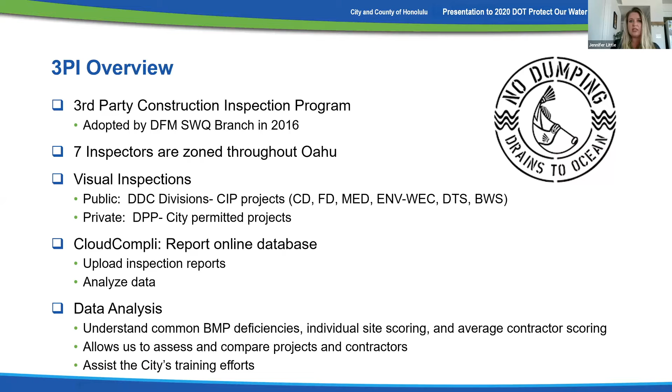So basically, we're able to assess the BMP deficiencies, the individual site scoring of the site. So we'll assign it a grade, if you will. And then we can also look at the average contractor scoring. So with that data analysis, we can use that for training purposes and also to see where we are in the program effectiveness, where we can make some changes and what we need to improve on.

So CloudCompli, like I said, allows us to upload our reports and different data into an online database, and we can use iPads, iPhones, Androids, laptops, etc. And we're also able to PDF and email reports to the contractors really easily with this program. And with the analytics, we can extract data. So as we're putting in how BMPs are working, we're able to extract that data. And I use Microsoft Power BI to develop that into graphs so we can see how we're doing as a program. As you can see with this pie chart, you can see our top deficiencies as a program.

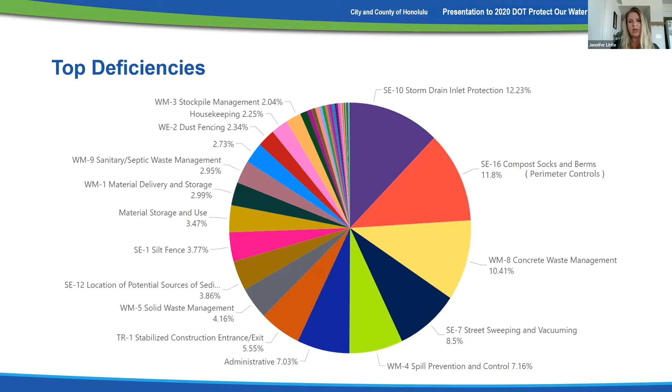So what we're seeing in the field mainly as deficient are storm drain inlet protection, compost socks and berms, which are often perimeter controls for smaller projects, concrete waste management, street sweeping and vacuuming, and spill prevention and control. So these are the top deficiencies that we're seeing program-wide throughout the island of Oahu. And that's with our 7 inspectors all going out to all these public and private projects and the average of these deficiencies here.

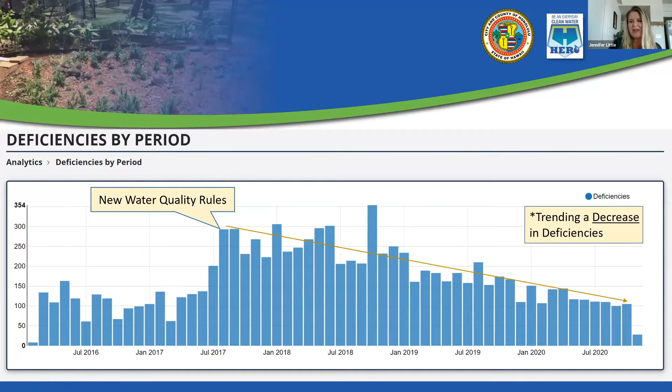Another graph that we're able to see is the total number of deficiencies over time. So we can also analyze the data over time. This was from the beginning of our program in 2016 to sometime last week. So as you can see, when the city adopted the new water quality rules in August of 2017, we had a spike in our deficiencies. And that's when our program came into full swing. So we were seeing everybody at that point. But as you can see over time, those deficiencies have decreased nicely. So we know our program is effective, and hopefully that arrow continues to go down.

So recently we decided to do a pilot virtual contractor training, and we chose a select group. And with our CloudCompli data, we were able to pick who we thought would be good candidates for this pilot training. And again, the focus was stormwater.

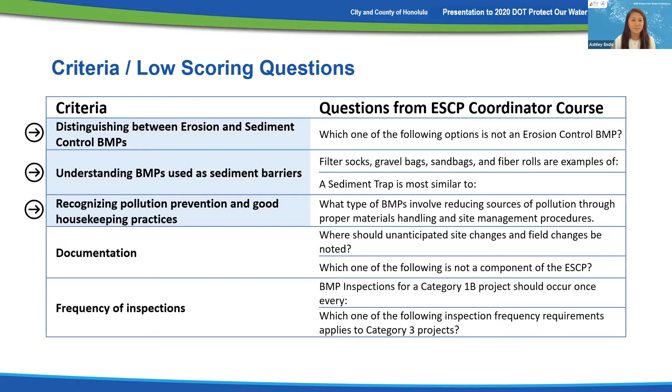And with the training criteria selected, we also verified the link between data analysis and the top third-party inspection issues in the field. So recall the pie chart that Jennifer shared earlier. The table here shows the criteria that was identified from our analytics matched to the field observations.

So for example, if we look at the second criteria that we got from the analysis, understanding BMPs used as sediment barriers, we can see that this links to a field observation of compost socks and berms. And matching allows us to validate the criteria with the 3PI issues, and then we can recommend that these topics be addressed by the virtual pilot contractor training.

And after selecting the topics to cover, we also evaluated the virtual pilot training using pre and post survey questions to try to measure learning.

So we deployed a survey before the virtual training that allowed participants to respond to questions about the course topics and also questions about themselves. And the same survey was offered after the training to see if there was any improvement in the scores of questions. We had 21 participants attend the pilot training.

And for this survey, it was voluntary, but we did encourage that participants take it. But we did see that we had more participants before the training. And because the survey was anonymous and voluntary, we didn't have the same participants before and after. And though our sample size might be on the smaller side, this was our best attempt at measuring learning from the pilot course.

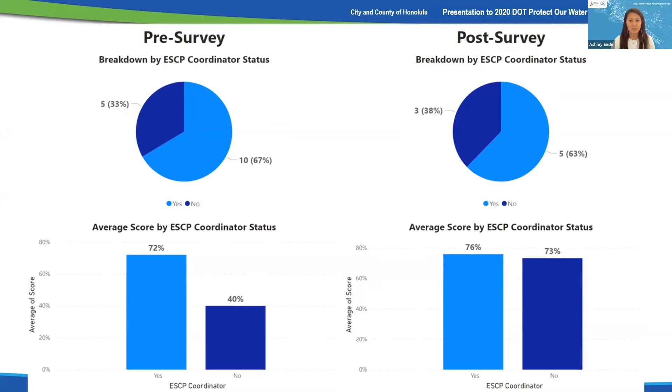And then the last attribute we looked at through the surveys was ESCP coordinator status. So this asks the question, does the participant have ESCP coordinator certification? And in both cases, about 2/3 of the people were certified, as you can see in the light blue of the pie charts. And so in the pre-survey, ESCP coordinators scored significantly better than those without certification. In the post-survey, we also saw a great improvement for the people who did not have ESCP coordinator status, and an improvement to overall scores as well.

We also assessed the scores of individual questions before and after the course. So these questions that were in the survey were designed to measure knowledge. Light blue is pre-survey and dark blue is post-survey. So average scores pre-survey were between 50 to 70%, whereas scores post-survey were between 60 to 100%. So we saw an improvement in each question with significant improvement for several questions.

And then one point to mention is you can see on the right-hand side that this question had pretty poor scoring and performance. And we think that it was because it was a select all that apply type of question, which might have been confusing. So we dropped this one as an outlier. And also keep in mind when looking at these scores that we don't have the same learners before and after, but we can still look at average scores as an indicator of improvement.

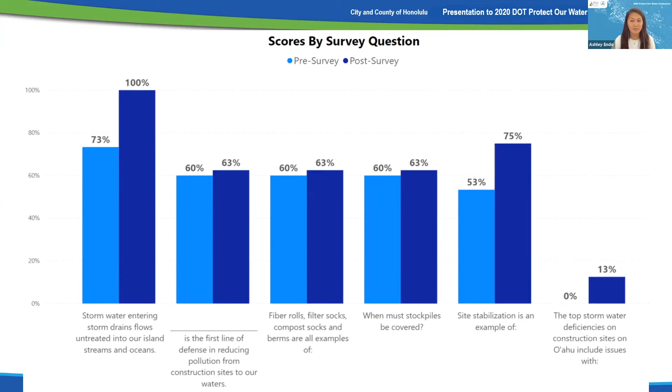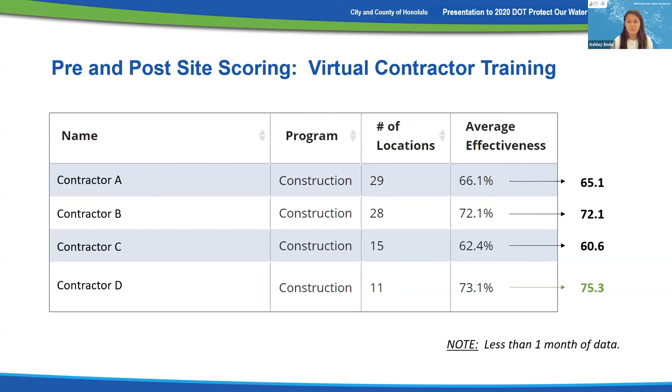So to summarize, we had many positive outcomes from the virtual training pilot, as shown when we analyzed the survey results. The scores improved across the post-survey in almost all the ways that they were measured. There was also improvement to the decision made in the situational question. The pilot course had a good turnout from the contractors, and in the feedback portion of the survey, we received positive feedback that the course was well received and that it was very informative.

And other notable things about using a virtual training is that the course can be recorded and it can be shared, and it allowed us to offer a participation certificate. Thank you. So now Dustin will talk about the city's role in inspection and enforcement.

All right, can you guys hear me? All right, thank you, Ashley.

So for me, I'll be talking about the construction inspections or the enforcement policy from the city. We're going through the construction inspection process. So for stormwater compliances, we'll have two main types of inspectors. You have your third-party inspection, which is the ones that Jennifer and them do, and they'll inspect the permitted sites. So ones that have building permits, grading permits, as well as trenching permits. And during their inspections, they'll identify deficiencies that they see at sites.

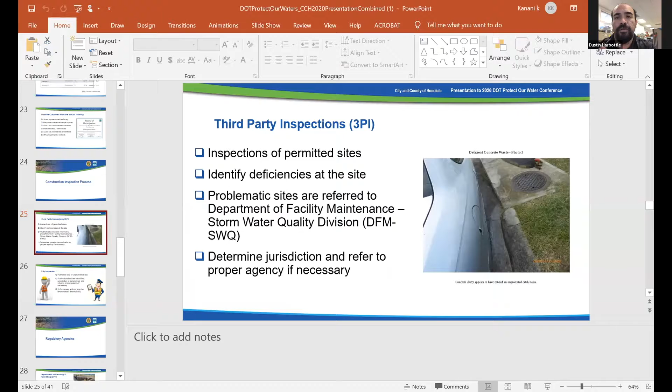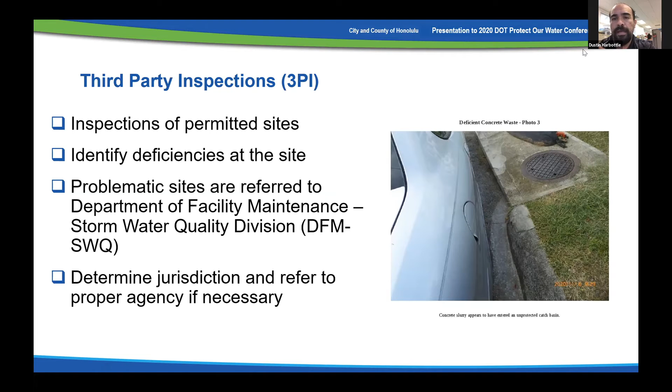And the ones that they find that are problematic, at that point, they'll refer those to the Department of Facility Maintenance, Stormwater Quality Division, which is our division. And from there, we'll determine whose jurisdiction it is and refer those to the proper agency if that is not within our right to do enforcement. Next slide.

The other ones will be your city inspectors. These ones will usually be your DPP inspectors. And for these guys, they'll inspect both permitted sites as well as unpermitted sites. And during those times, if they identify any violations during their inspections, they'll determine whose jurisdiction it is, if it's theirs or if it's another agency. And if it's another agency, they'll go ahead and refer those to those proper agencies. But if it's their jurisdiction, then they can implement enforcement actions right there on the spot. Next slide.

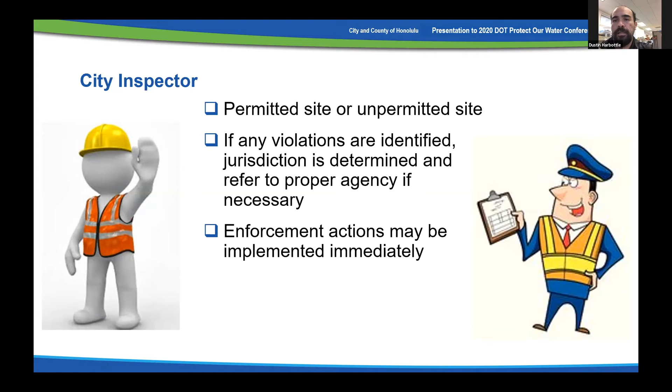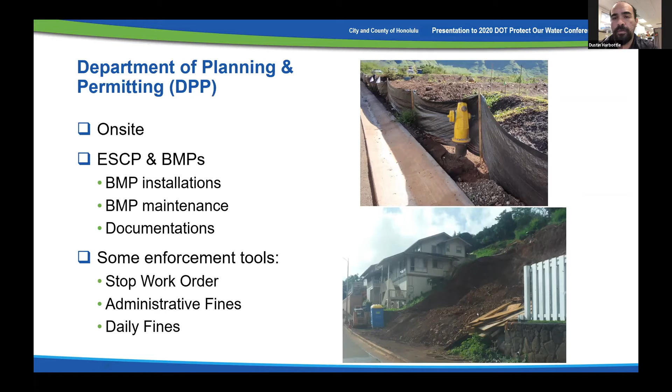All right, so the different types of regulatory agencies for the city stormwater compliance, those ones will be, next slide, please, the Department of Planning and Permitting, where they'll deal with the things that are happening on site. So these will be your erosion sediment control plans, as well as your BMPs. That's your BMP installations, the BMP maintenance, as well as any documentation required for the rules related to stormwater quality that the city had adopted in the past couple of years. Some of their enforcement tools will be they can issue stop work orders, as well as administrative fines and also daily fines. Next slide.

So the other agency would be our agency, the Department of Facility Maintenance, Stormwater Quality Division. We'll handle the things that happen off-site. So these will be any discharges that enter the city's MS4, which is our drainage system, which can be concrete waste, tracking, or any type of pollutant runoff. Now for us, the city's MS4 is any drainage structure, as well as the roadways would also be included in that, any kind of conveyance of stormwater. Some of the types of enforcement that we have are letter of warnings, notice of violations, as well as notice of orders. Next slide.

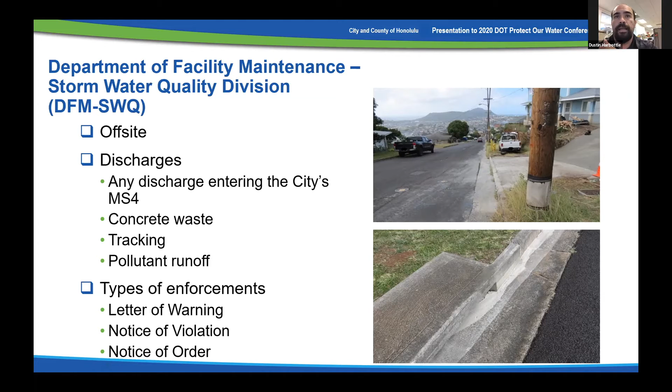So I can't really speak on the Department of Planning and Permitting's enforcement process, but what I will do is kind of go through the stormwater's enforcement process. Next slide. So for our enforcement, the main one that we'll enforce on for any kind of pollutant discharge is the Revised Ordinances of Honolulu 14-12.23, which is basically the ordinance that prohibits any pollutant discharge into any of the city's stormwater systems.

For these, the main two that we'll issue for the violation is NOV, or a notice of violation, which are always issued to first-time violators, where these kind of violations allow the offenders to go and correct the issue, whereas a notice of order are issued to repeat offenders, and those ones are always associated with some type of fine. Something to note is that for the city's enforcement on stormwater pollutant discharges, our minimum fine is $1,000, and they can go up as high as $25,000. Next slide.

All right, so for these ones, some of our policies and processes is that we will issue violations to multiple people for the same violation. So this could be a property owner, a property manager, a business, a contractor, or a subcontractor. So if something happened at a site where a contractor had discharged off of the site, we'll issue the violation to both the contractor as well as the property owner.

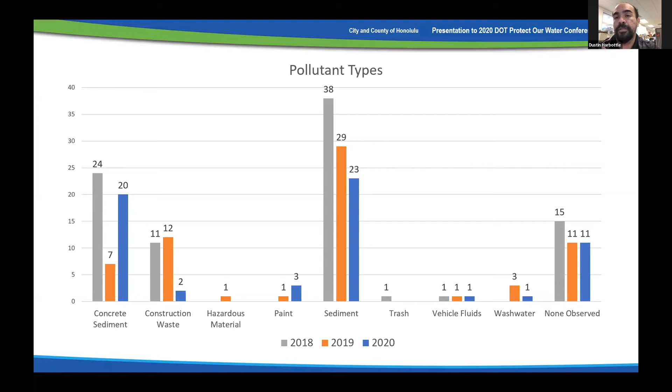So this is a graph where for the past 3 years, it's the different types of pollutant types that we've received complaints that have come from construction sites. And something to note is that the primary one that we usually see is sediment or concrete sediment. And this kind of ties into the same things that the third-party inspectors had noted on some of the BMPs that would have prevented these kind of discharges. Next slide.

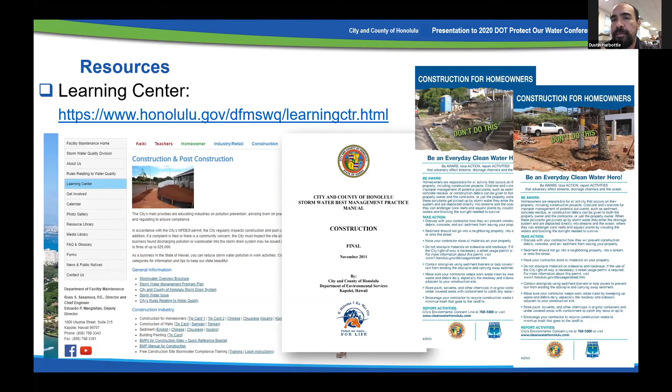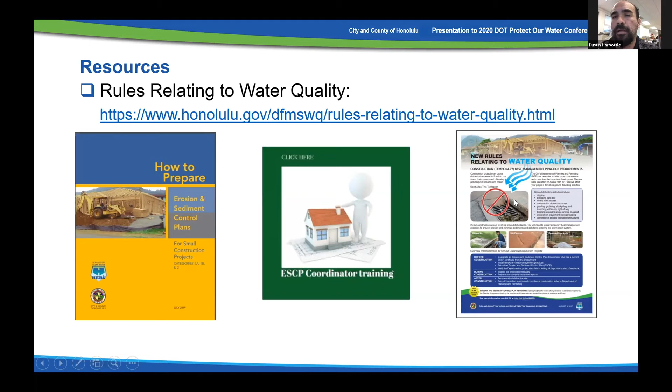As well as our resources for rules related to water quality. And in these ones, they'll offer other manuals and brochures about the rules related to water quality. Something to note is that these resources are also offered in other languages. And then this one also offers trainings such as the ESCP coordinator. And we just wanted to let everybody know that all of these things are available on our website at www.cleanwaterhonolulu.com. Next slide.